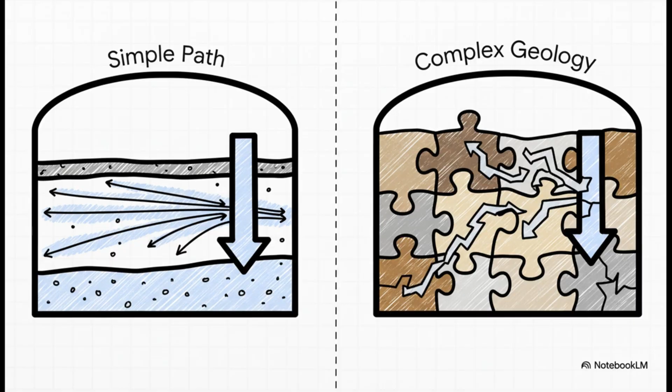On the surface, the goal couldn't be simpler. Get as much out as possible. But the thing is, the rock formations down there are almost never that cooperative. Seriously, every single one is a totally unique geological puzzle that has to be solved before a single drop of oil is ever going to see the light of day. To really get why the solutions are so clever, we first have to wrap our heads around the number one enemy that engineers are battling deep, deep underground.

And that number one enemy has a really simple name: skin. The best way to think about it is like a massive 5-lane traffic jam that suddenly squeezes down to 1 lane right at the exit ramp. You see, the act of drilling itself can actually damage the rock or clog up all the tiny little pores right around the well.

This creates a bottleneck, a zone of really low flow, that's the skin, and it can literally choke production. So you could say the entire point of well completion is to figure out how to get around or just get rid of this skin.

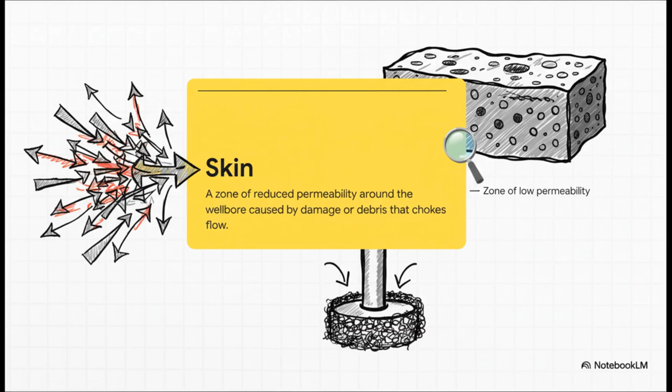So, what's the easiest way to deal with this skin problem? Well, in a perfect world, the geology pretty much does all the heavy lifting for you. This best-case scenario is what's known as a natural completion. Now, this approach only works if you've basically hit the geological jackpot. We're talking about a near-perfect reservoir.

You've got stable sandstone that's just naturally super permeable, meaning fluid can flow through it like water through a sponge. The magic number you're looking for here is a permeability over 10 millidarcies. If you've got that and the skin damage from drilling is minimal, you are in fantastic shape. In this kind of dream scenario, the fix is pretty straightforward.

You just perforate. Engineers use these powerful explosive charges to punch a bunch of holes through the well's steel casing and the cement, creating little tunnels that lead directly into the good rock. And here's the key insight. It's not about how big the holes are. What really matters is how deep they go and how many of them you can make. It's all about creating a ton of deep pathways that just bypass any of that minor skin damage.

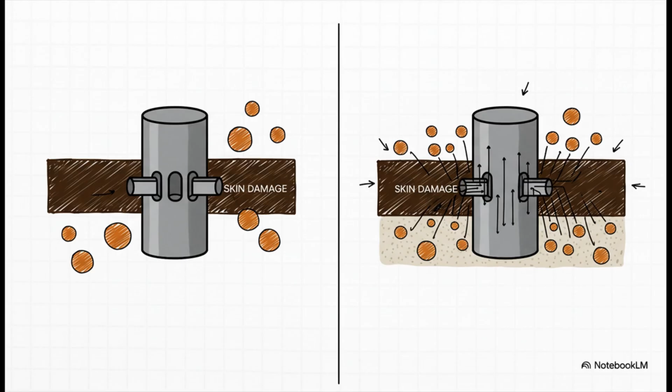So yeah, that's plan A, when everything goes just right. But like we said, geology is rarely that nice. So what do you do when the rock is too tight, not very permeable, and that traffic jam, that skin damage, is just way too bad to ignore? This is where engineers have to get creative. They have to go beyond just poking holes and actively stimulate the reservoir to force it to produce. And this whole family of techniques is called stimulated completions.

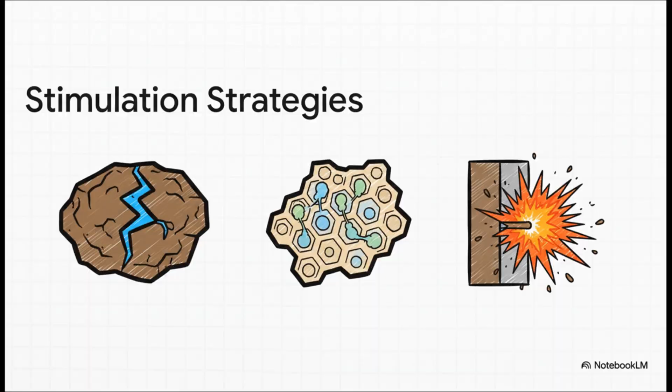In this stimulation toolkit, engineers have 3 main power tools they can turn to: hydraulic fracturing, acidizing, and a really intense method called extreme overbalance perforating. And each one is designed to solve a very, very specific kind of problem down there. All right, so let's open up this toolkit. Let's take a closer look at how each of these tools actually works and, maybe more importantly, figure out the specific situations where you'd pick one over the others.

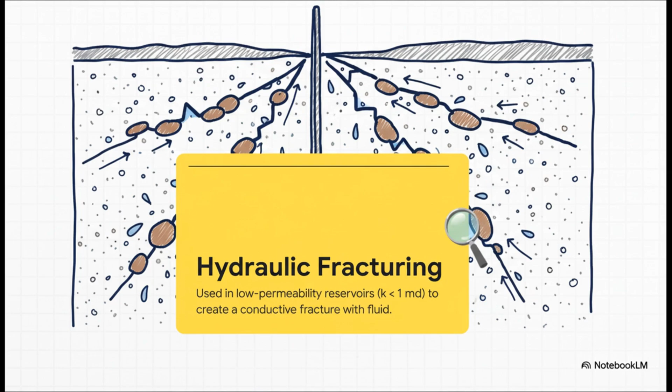First up is the one you've almost definitely heard of: hydraulic fracturing. This is the go-to method when you're dealing with rock that has extremely low permeability, what people call tight formations. Here, the goal isn't to clear out old pathways. No, the goal is to create a brand new, man-made superhighway for the oil and gas to travel through.

The whole process is actually a pretty precise multi-step dance. After prepping the well, engineers use high-pressure fluid to start a crack in the rock. Then, they push that fracture deeper and deeper into the formation.

Now, here comes the most critical step. They inject something called a proppant. It's usually just sand, and that props the crack open so it can't close back up when the pressure is turned off. After that, they just clean out the well, and you're ready to start production.

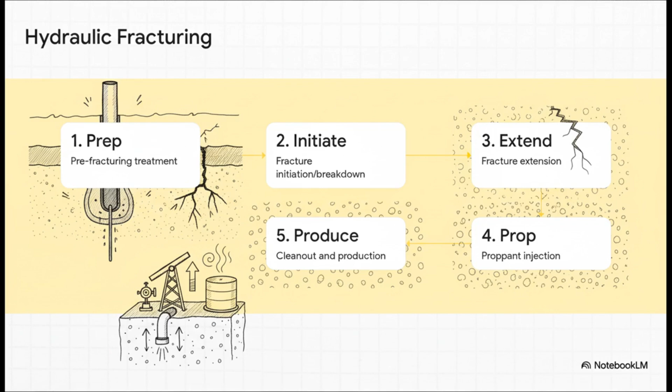Okay, now for a totally different strategy: acidizing. So if hydraulic fracturing is like building a whole new highway, you can think of acidizing as calling in the ultimate road repair crew. Its main job is to fix existing damage by dissolving all the gunk, the debris and minerals that are clogging up the rock's natural pores right near the well.

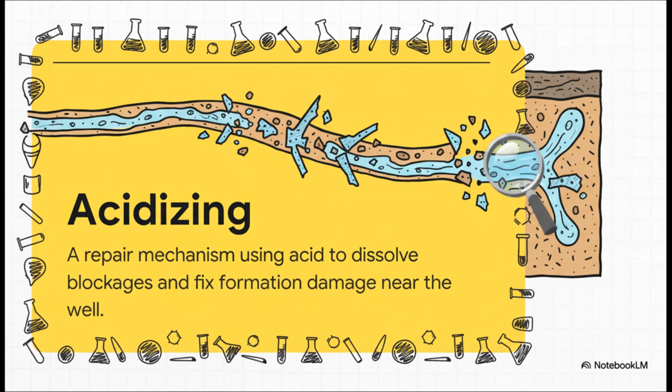And there are 2 main ways to use acid. The first is matrix acidizing. Here you use low pressure. You're just letting the acid kind of seep into the rock to dissolve any plugs in the existing pathways.

But with acid fracturing, you use high pressure to actually crack the rock first. Then the acid goes in and etches the sides of that new crack. So when the pressure comes off, the crack closes, but those rough, etched surfaces don't seal up perfectly, which leaves a brand new path for oil and gas to flow.

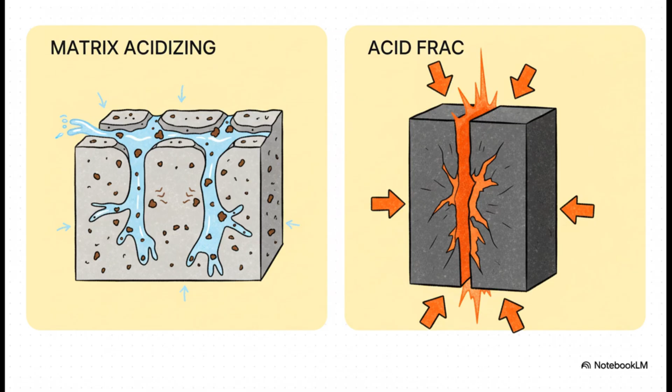One huge plus for acid fracturing is you don't need to use proppant, which makes the whole operation a lot simpler. But there's a trade-off. You lose some control. Sometimes the acid dissolves the rock unevenly and creates these really inefficient little channels that engineers call wormholes, instead of one nice, uniform fracture.

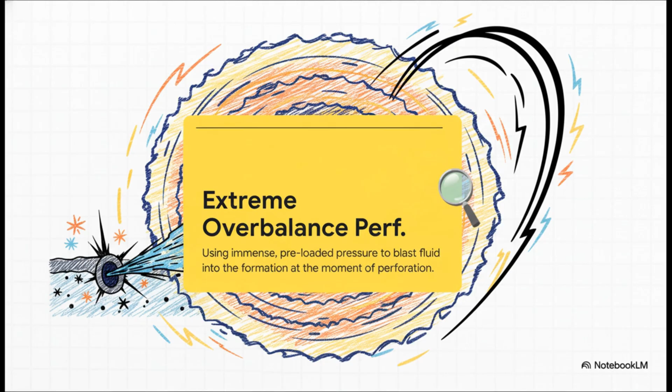And finally, we've got the most, let's say, dramatic option on the list: extreme overbalance perforating, or EOP. This technique is brilliant because it combines the perforation and the stimulation into one single, incredibly powerful blast. The whole idea is to hit the rock formation with a massive shockwave of energy at the exact same instant the perforations are being created.

Here's how it works, and it happens in a flash. First, engineers use nitrogen gas to build up a crazy amount of pressure inside the well, way more than what's needed to fracture the rock. Then, while it's under all that pressure, they fire the perforating guns. This sudden release creates a huge shockwave that blasts stimulation fluid deep into those brand new tunnels before the rock around them even has a chance to react.

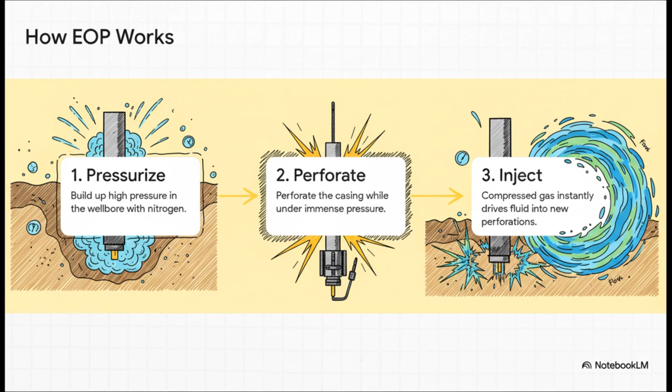So we've just walked through 3 very different ways to stimulate a well. And all of this brings us to what is maybe the most important rule in all of well completion engineering. And that rule is really simple. There is no single best method. There's no silver bullet. You don't just pick the most powerful tool in the box. The choice to use hydraulic fracturing or acidizing or EOP comes down entirely to a super careful diagnosis of the specific geological puzzle you're trying to crack.

Let's just break it down one last time to make it crystal clear. If your main problem is that the rock itself just doesn't flow well, low permeability, you turn to hydraulic fracturing to build new highways. If the problem is just some localized damage, clogged pores right around the well, then acidizing is your go-to repair tool. And if you need a really powerful, targeted kick right at the moment of perforation, that is a job for EOP.

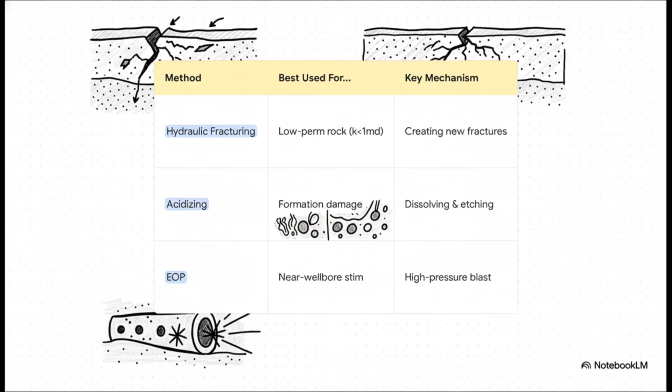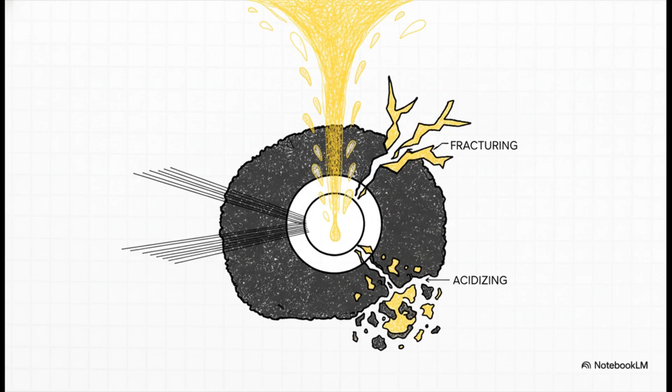See, in the end, it doesn't matter if it's a simple perforation in a perfect reservoir or a massive, complex, multi-stage frac job. Every single decision an engineer makes comes right back to solving that one core problem we started with: beating the skin and clearing a path for that energy to flow.

The techniques we've just talked about are unbelievably powerful and precise. They represent decades and decades of innovation. And as we try to figure out our complex energy future, it really does raise a pretty big question. Is this kind of sophisticated engineering part of the problem, or is it an absolutely essential part of the solution?